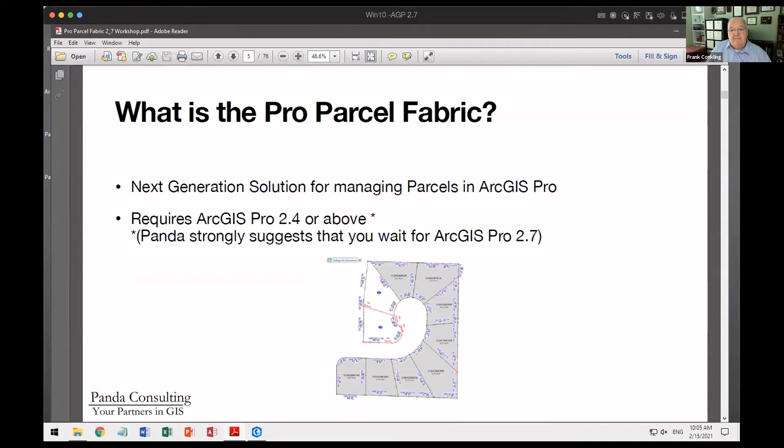So the parcel fabric, what is it? What does it do? Obviously, it uses ArcGIS Pro. You need ArcGIS Pro to work with the ArcGIS Pro parcel fabric. And it differs from previous attempts to build some sort of parcel editing solution, in that rather than being a complete configuration, the parcel fabric is something different, and the way you deploy it is different.

The first thing I'm going to do is look at a geodatabase here, the WLIA geodatabase. It's got some standard feature classes in there: a parcel feature class, a road feature class, a subdivision feature class, and a municipalities feature class. These are just standard feature classes, nothing strange about them at all. If I open and look at them in the design component, I can see the standard types of fields that are in here, nothing strange or unique about it.

So I just want to pick up and start with this. Let's build our parcel fabric. Let's look at the parcel fabric and see how it's actually constructed.

The first thing we want to do with the parcel fabric is create a feature dataset. Now, why a feature dataset? What does a feature dataset need? A feature dataset is required primarily because all of the feature classes inside of the parcel fabric share topology. And in order to have topology, you need a feature dataset, which defines the spatial reference for all layers grouped underneath it.

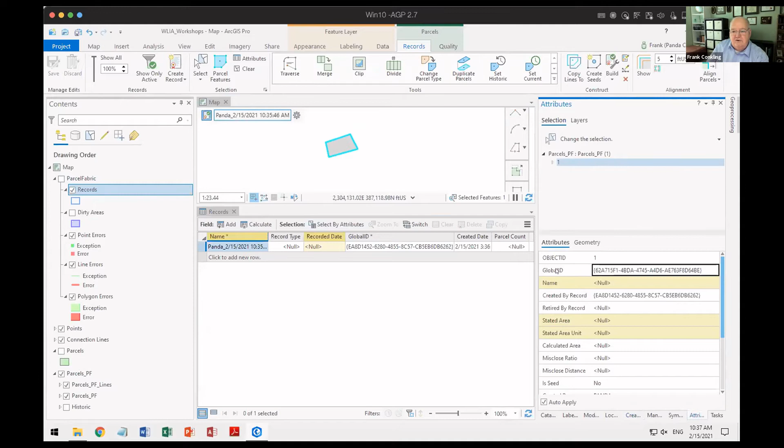So now this polygon that I just created has its own global ID, but it also contains the global ID from the record that was used to go and build it. So it's tracking the global ID of the record that was active when I built this. That's the key, that's the Rosetta Stone to the parcel fabric. It's the global ID of the record, and it's going to use that over and over and over again.

So if I go in here and say okay, well let's go and create some lines, and I create these lines and I select them, those lines, when I look at what is common through all of these records, it's that created by global ID. It goes and marks everything that's created at this time while this record is active, marks everything with that global ID of the active record.

I'll go a little bit further. Let's select that and delete it. Now, it really didn't delete it. Actually, it did delete it because I didn't mark it historic. Sorry, live demo.

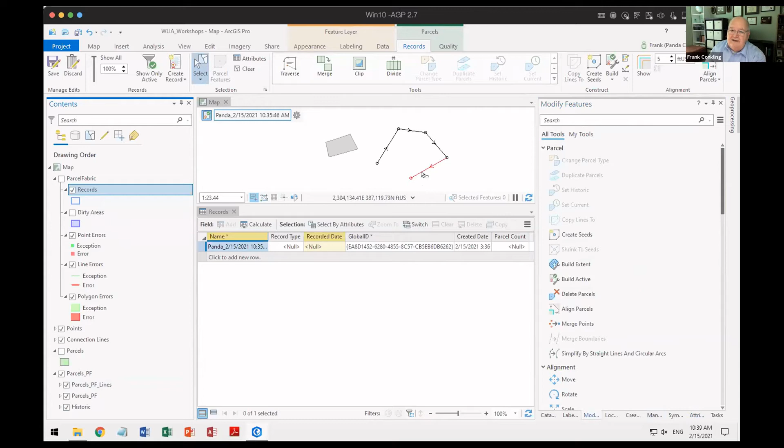Let's take this and go back to my modify and set that as historic. It didn't delete it, it actually just set it as historic. And if I go and select this now, I will see that not only does it say that it created it, but it also retired it, it marked it as historic.

Again, this is the Rosetta Stone for how everything works inside of here. Let me go and delete all of these out of here. Okay, let me take this one again.

Let's demonstrate really what the parcel fabric is doing. It's not just organizing it, but it's actually applying and making sure that the rules are complied with, that it goes and complies with every rule that's defined as part of this parcel. And remember, we said that a parcel has, let's go in here and look at the properties, and it has inside of here, the rules are that it has to have a record associated with it.

It has to have lines on top of it, and the lines have to have points on the end of them. Well, right now I have a polygon that's not in compliance with any of those rules. It has a polygon, but it has no lines, no points or anything on it. So when I tell it to go and build my active record, it will go and automatically create the lines and create the points for that polygon that I created.

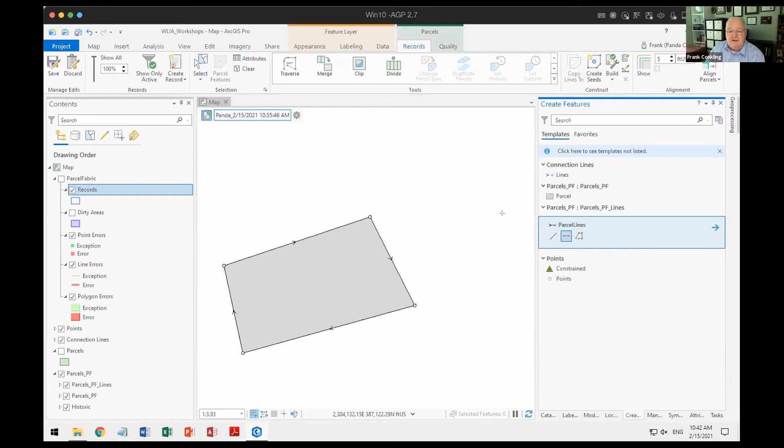Same way, if we were to go in here and say, well, let's just build some lines again. We can build these lines in here. And I can say, well, let's go ahead and build this. It's not going to build anything else because it's not sure that I want to create a polygon out of this. In order to create a polygon, I create what's called a seed. And that seed, this is really big, actually tells the parcel fabric that there's supposed to be a polygon inside of there. So I can tell it to build it.

It says, you've got a record that has polygons. Make sure that polygon all has lines on it. Or you've got a record that has a seed. Make sure that that seed is built out so it goes all the way out to the lines. Any questions on this? None?

All right. I'm going to discard everything. I'll also take care of this. Delete this. Delete this. And I'm going to go to manage, and I'm going to go and delete my record. All right, I'm back to a clean parcel fabric on here. And I have here my parcel types. Disregard this. Let's rename this original parcels to be migrated.

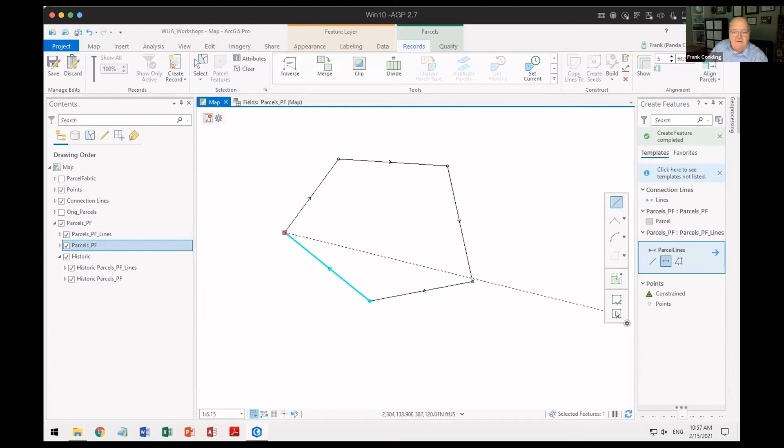So the next attribute field that we're looking at inside the polygon is seed. This tells the software whether or not this polygon, this seed, should be expanded out, whether or not the group of lines is intending to be a polygon or not. Let's go back here again and examine this a little bit more. So I can go in here and I can draw a series of lines, and just sort of graphically do that.

And then I could go in there and I could say, oh, I forgot to create a record, didn't I? Oh my gosh. By the way, most of the times I do this, I do it on purpose. Sometimes I do it by mistake. But I'll use this to illustrate.

The record is the organizing element. If you don't have a record, you can't use any of the parcel fabric elements. You must have a record active that it's going to use to track this. I created a bunch of lines. Do I have to go back and recreate them now? No. I can create a record here, select these lines, and pull down this and say, assign those lines to my record. It went and calculated the global ID of that record and put it on every one of those features that I had selected. So again, I retrofitted a series of lines to a record.

Now I can go in here and say, create some seeds in here. It creates 3 seeds. I can go in here and select this seed. And by the way, this is a polygon. It just has really weird geometry on it. It basically is just a circle. It's the beginning of a polygon. It is a polygon. The only difference is that this attribute here says this is a seed. This is the beginning of a polygon, not a full-blown polygon. I'm going to delete that seed.

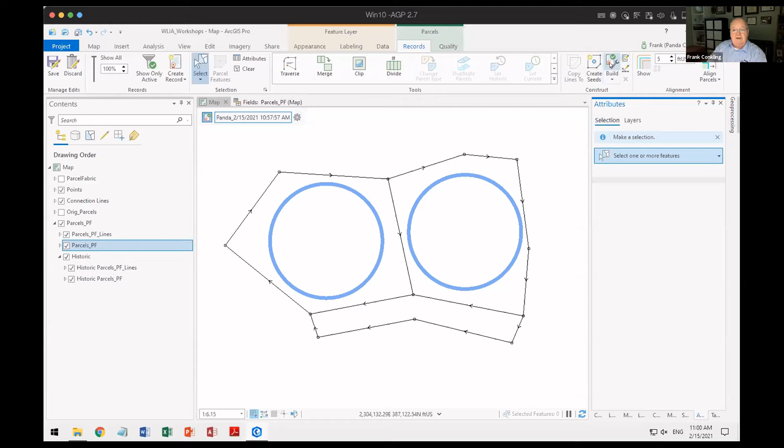So I'm going to say build. It will build these 2 polygons, but because we did not have a seed here, it did not build this polygon, which can exist as just lines inside this record. The rule is that the features have to have a record. It doesn't say that all closed lines have to have a polygon associated with them. All right.

So let me go and discard that. Let me save all this here. Let me go back to here. So on the parcels polygon feature class, I have an isSeed attribute. And again, it's either yes or no. By default, it's set to no.

All right, the next 4 attributes are editor tracking. By default, your parcel fabric must have editor tracking turned on. Okay, must have editor tracking turned on. However, I'm not going to tell that joke. These are not the same editor tracking fields as were in the ArcMap parcel fabric. These are the new editor tracking fields.

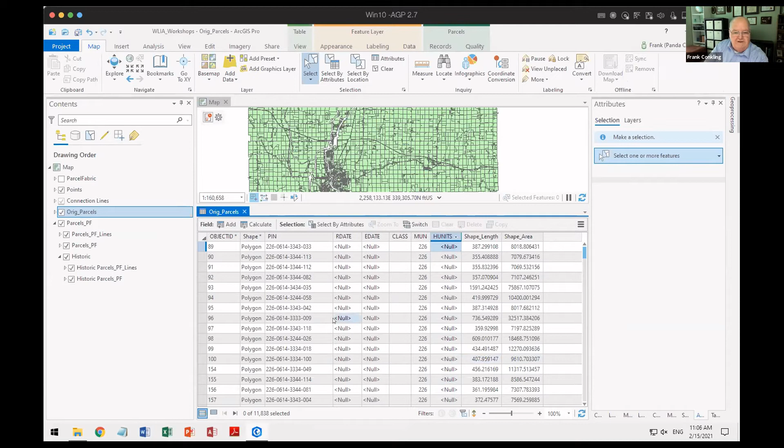All right, it looks like they're almost all populated. They may not be consistent. This one here, this H units, doesn't look like it has anything in it. Probably is intending to be housing units, but we're going to keep it in there anyway. So what we're going to do is take these parcels, these polygons, and load them into our parcel fabric.

There's a geoprocessing tool called Append that we're going to use. And this is going to tell us what we want to append. In this case, we're going to append our original parcels into our parcels PF. Really important is this next step, the field matching type. If I keep it where the input fields must match the target fields, it's going to fail because the fields don't match. They are different schemas.

Instead, what I want to do is create a field map and say, if I don't have an attribute that goes into a new field, give me the option to figure out what to do with it. So I'll click on that, and it will tell me what fields it does have, marked in black, and what fields I don't have. This is very important. You must do this.

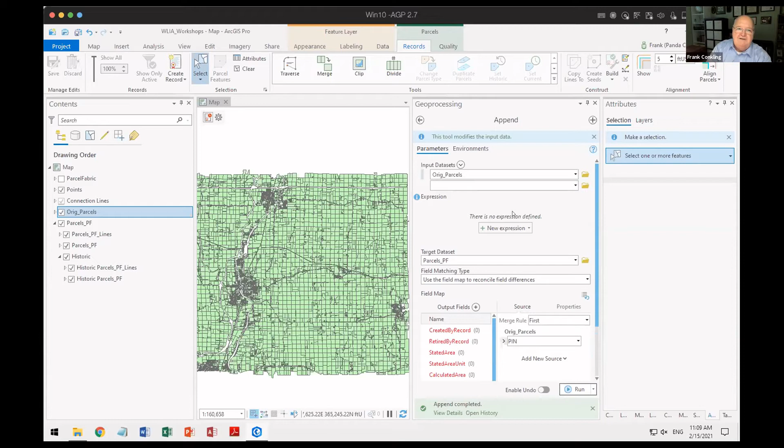What I have found consistently is the best way to do this is have both of these feature classes in a map document and do it from there. And that seems to be the most consistent way. Now that I've said that, let me open this thing up. Well, it is there. Let me open up the attributes and make sure that everything came in. And in fact, the name field came in, which is good.

Note state, created by records, not built yet. Retired by records, not there. Because I haven't really built any of this stuff yet. I've just sort of loaded those polygons in. Stated area is not calculated. Stated area unit's not calculated. Calculated area is not. Nothing is calculated yet. Misclosure distances, nothing. The seeds are made by default.

It is tracking me and tracking everything I'm doing here. And validation status is set up because there's nothing there. Here's these original attributes that are in here. So it looks like it came in correctly. Everything came in correctly. You want to make sure that that happens. There's no lines. There's no points.

There's no records. The next thing I have to do is go through here and prepare it for the parcel fabric. I have to say, okay, well, what's the first thing I need? I need a record with everything. So I'm going to go and run a geoprocessing tool called Create Parcel Records on here.

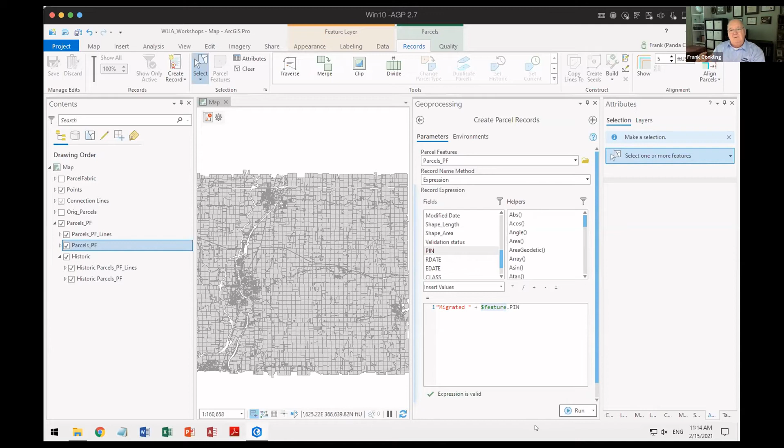I can go ahead and validate that. Yes, this is good Arcade code. This will work. Now, again, I could do a whole bunch of things with this. If these were lot polygons, conveyance division polygons, using the LGIM terminology, I could tell it to go and append not just the lot number, but I could tell it using Arcade to go and intersect the subdivision, or the simultaneous conveyance, in which that's located, and take the SIMCON name and add that with a separator to the lot name.

So I could tell, as part of this calculation, tell me where this lot is located, not just what it is, but where it's located using Arcade. Arcade using an element called feature sets and using the Arcade intersect functions against those feature sets. Arcade is an absolutely amazing scripting language. Again, you're going to find that used throughout the Parcel Fabric and ArcGIS Pro. You should learn how to use it.

All right, I'll go ahead and run this. It's going to create records for me. Just to verify, I have the one record that I created initially. All right, let's go ahead and delete that record. I don't want that one anymore, but I have no records on here.

It's another thing you don't do. I almost just did it. When you're creating records, do not have your record table open. It will give you a lock error, meaning that it can't add things there because you've got it open and have locked that table. Keep the record table closed. Let's go ahead and migrate these and create records for everything.

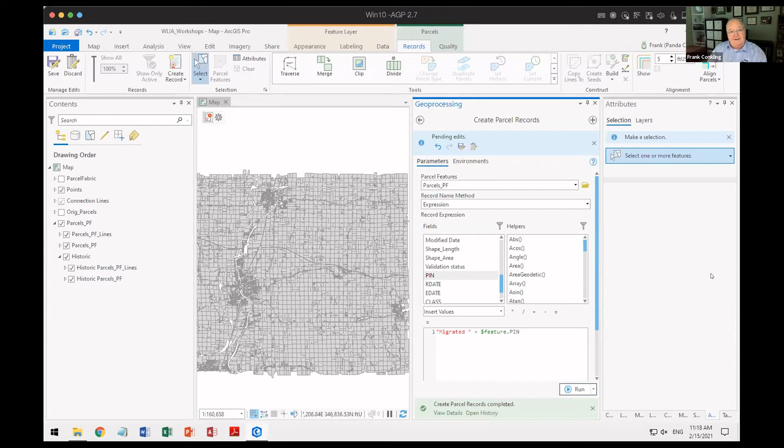Okay. Let's see what happened here. Let's go to records and open up the attribute table. And I now have a whole bunch of records, and these records all say migrated, which is the text I appended to it, and then a dash, and then the parcel number, the PIN number. It says nothing about the record type, nothing about the record date. They all have been assigned a global ID. They all have been defined as far as the date that these records were created. And finally, it tells me how many parcels are part of that record.

Now, interesting, I never checked. We actually have a couple of parcels here. We have Bark River here, which was 2 parcels. We also have another one here, which is a multi-part polygon, which has 2 parcels. So the next question is, can the ArcGIS Parcel Fabric contain multi-part polygons? Because if you recall, the ArcMap Parcel Fabric always had a problem with them. The answer is yes, you can. Still a little funky once in a while when you're doing clips, but it can do multi-part polygons.

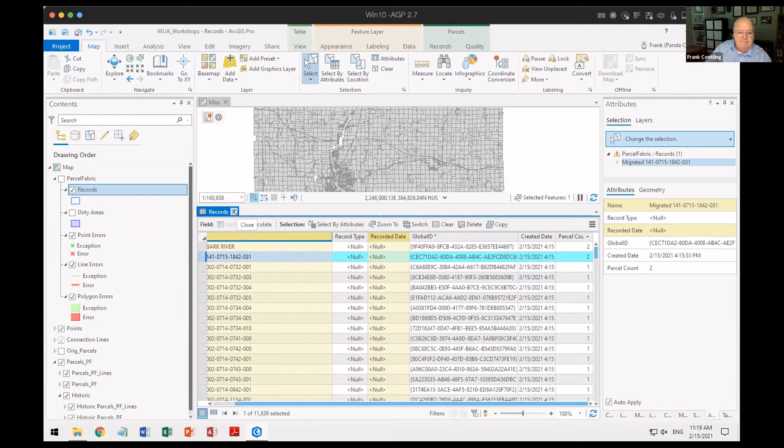So I now have records. If I go in here, I still don't see any lines. I don't see any corners in here at all either. So if I look at my parcel lines, there's no parcel lines created yet. So while I may have migrated those polygons in there and I created records for them, I still have not built this parcel fabric yet to be everything that it needs to be. It hasn't validated anything on here.

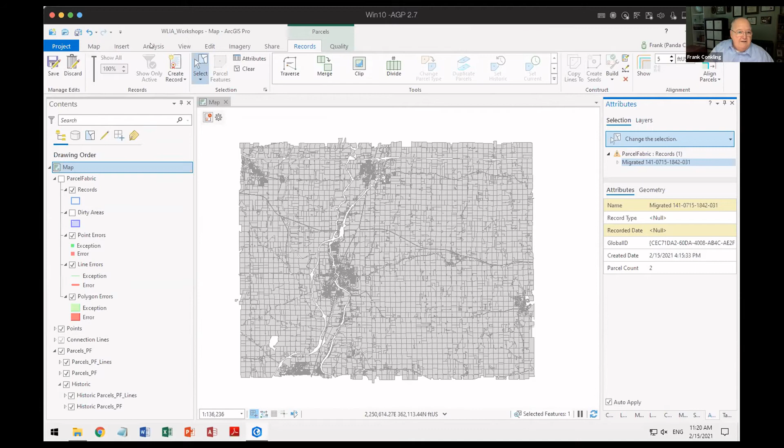So let's go out here. I guess I shut that down, didn't I? Let's go and open up our geoprocessing again. And now what I'm going to do is say build my parcel fabric.

Now remember, a build is nothing more than the controller object looking at the records table and saying, if I have a polygon here, does that polygon have lines on it? If it doesn't have lines, we'll build the lines. Does it have corners on the ends of those lines? If it doesn't have corners, it will build those corners for me automatically. That's all the parcel fabric does, it checks the rules to make sure they are complied with.

So now let's go in here and say parcel fabric, and for the extent I want to build my entire parcel fabric, build all of these out. And say run. So it will go through and build these, and it'll take a couple of minutes to do that.

Any questions? Any comments yet?

Anything in here? Now, by the way, this is usually where ESRI kind of stops. It says, okay, you have a parcel fabric now, and you can work with this. Yes, you can, but there's a whole bunch of things in here that are nowhere near being complete. It's nowhere near something you can actually work with. It's not done yet, not fully baked. It is a parcel fabric, yes, and it has records in it, yes, but it is not fully baked in here yet. And that's where you want to make sure you talk to somebody or contract with somebody who knows what they're doing to actually flesh out all of this. There's lots of little gotchas in here that you want to make sure are taken care of.

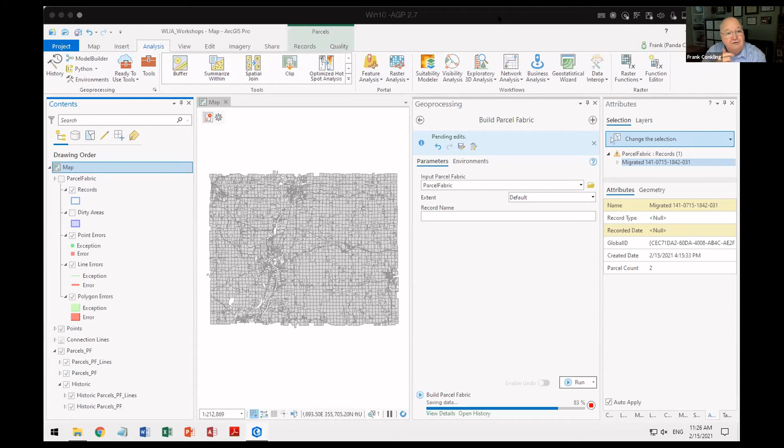So let me ask you something else. Is everybody excited about the trivia Thursday night? Definitely, yeah, yeah. Hopefully you can all participate. We're not quite sure how many teams we're going to have, but we'll see, because we don't have a sign up. You show up Thursday night, you can do that. We're going to enable teams, and we'll enable breakout rooms if you want. If people are not in the same location, you can have a breakout room and move in there to answer questions. It usually takes about, because we have 7 different categories of questions, and each category has 10 questions associated with it. We have everything from general knowledge, Green Bay Packers, WLIA trivia, beers - who can identify the beers that are in here - an audio round which asks you to listen and see if you can identify some songs that have a word in them, then GIS trivia, and Wisconsin cheese trivia. So we've got enough of those. And there are prizes. Right now the prize is set at 75 for first place team, 50 for second, and 25 for third place. We're thinking we may up that a little bit, maybe going to 100, 75, and 50. We'll have to see what sort of turnout we get there. And those prizes, by the way, are going to be Amazon gift cards so we can just send them to you by email. All right, it looks like it's finished.

So how do we know it's finished? Well, we have a whole bunch of points in there, don't we? We have a lot of points in here. And I'm going to zoom in here. And now what I'll find is that...

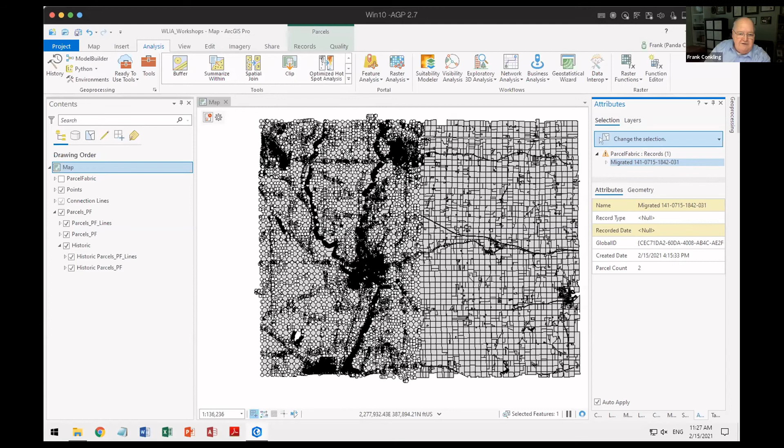We have some points in here. We have points, we have lines in here. We have some early symbology set on here. Let's talk about what's not here and some of the things we're going to find in here also.

So the first thing we find is that as we zoom in and out, right now I'm at 1571 and I zoom out to 2000, and those little tick marks on our lines, as we zoom out to 2000, they disappear. It turns out that what the Parcel fabric has implemented is scale-based symbology.

And that scale-based symbology, if we go over here and look at this at 2000 scale, it's just a straight line. But as we move in, suddenly you'll see, oh wait a minute. As we zoom in our scale a little bit, suddenly the symbology becomes, it's got endpoints on it and such.

And that's a little disconcerting when you first start using this thing because of the way it's set, where maybe you're going in and doing a big parcel and suddenly you lose all the endpoints on here. We're going to talk this afternoon about how you configure that on here, and hopefully that will help you a little bit. But scale-based symbology is set so that as we zoom out, the symbology changes on here.

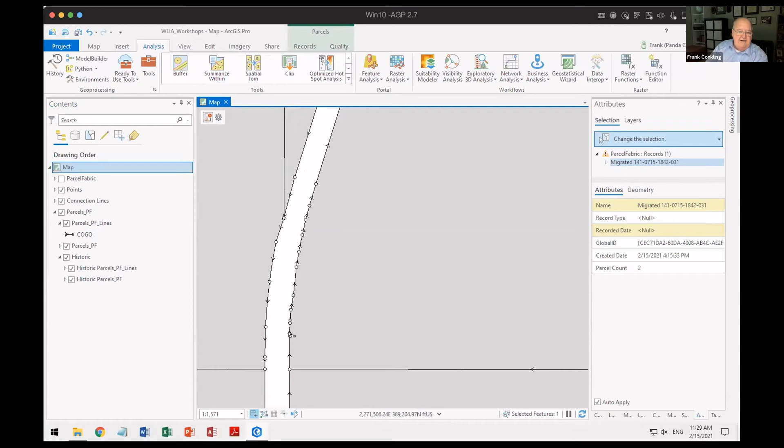What we'll also find is that, if there are densified curves inside of this data set, it does not resolve any densified curves. Things like this here. This is all a series of small lines and such that are on here.

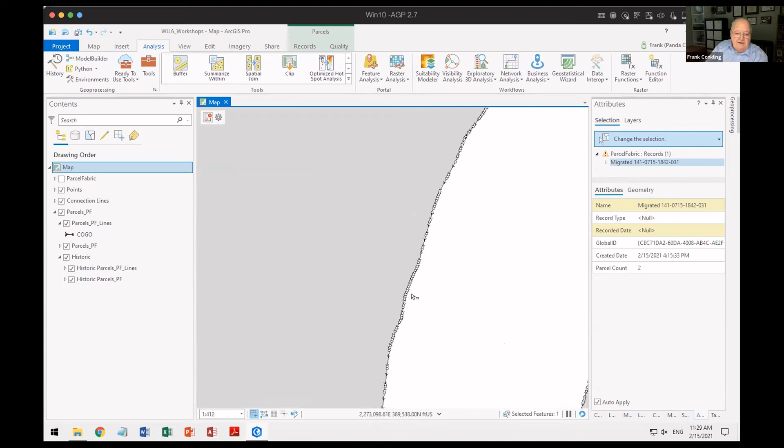By the way, we could have, if we wanted to, in order to work with that, merged points on here or merged the lines on here if we had a line feature class for that, so that it doesn't have those elements on here, all those individual small points on here.

You can have a riparian area on here, but again, these are more densified curves in here, more densified curves in here. You can very quickly see some of the deficiencies in your data when you bring this in. And I'm not looking at this to point anybody's data out. Everybody has skeletons, so don't worry about it.

So let's go and explore that one thing I just said earlier about having areas that don't necessarily have all these small lines on them.

I'm going to go in and I'm going to remember to create a record right now. I'm going to create a record. And then what I'm going to do is start editing. I'm going to go to create. I'm going to create a series of lines.

All right, and I have two options here. I can create just sort of regular polylines, and I can also create 2-point lines.

If I create polylines in here, or I go to streaming, I can go and do streaming, and I can finish this part. I can stop streaming and go back to a regular one on here.

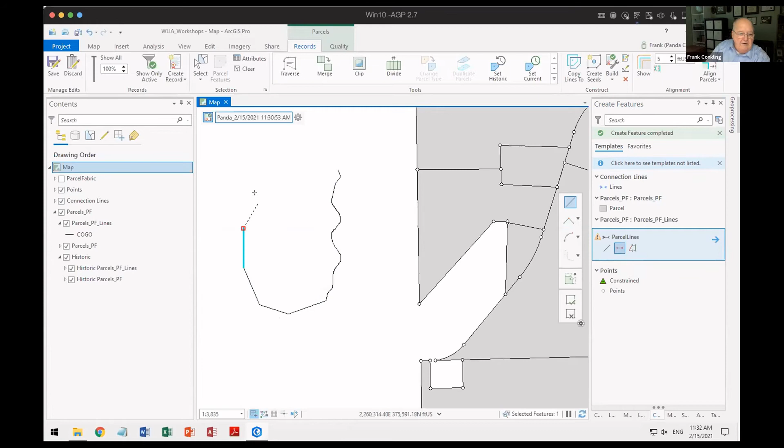I can go to 2-point lines. I can input bearing and distance. I can go in here and finish this line. It's a series of lines in here.

I can say, go ahead and build a seed. There's my seed, and say build this. And when I build it, oh, it actually did create individual ones in there.

Let's make sure. Oh, so that streaming didn't work on here. I actually went and densified those.

Ah, so let's discard that. So you can actually go and create these without...

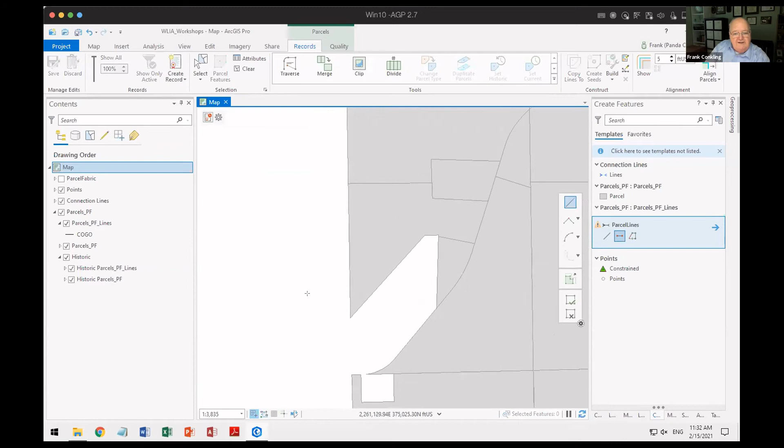I'm thinking here. I'm looking for my points and my lines. It's almost like it didn't create them anymore. Like I undid them. I discarded those without saving them. These should not have been part of my edit.

Sorry about that, live demo. I should not have done that. So what I'm going to do is go in and look at my history, and just rebuild that parcel fabric again. I did not mark enable undo, so it shouldn't have been saving it. It should have automatically been validated on here. It's okay.

Jeremiah said you're going to miss the start of trivia. It's all right. The key is just go and get yourself on a team, let them answer the early ones, and then you come back and be the white knight coming in giving them all the answers at the end, right?

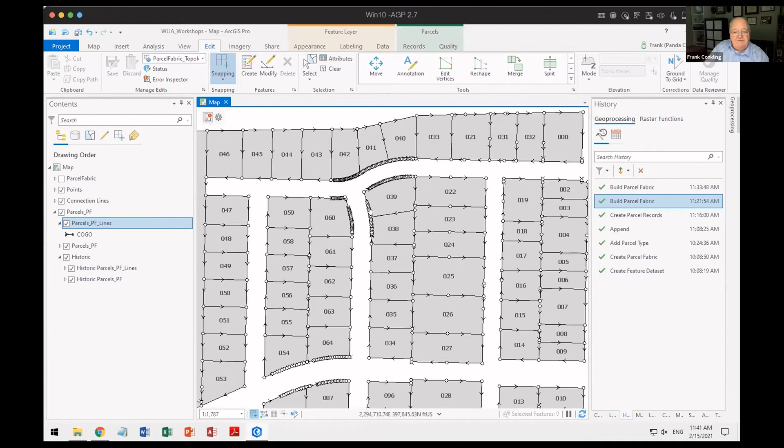So again, going through this is now built. Let's make sure that I save this project and that I save my edits and not undo them anymore. All right. And again, some of the things you want to watch out for is when this migrates over, you've got to recognize you'll have scale dependent symbology. And if you've got densified curves in there, they will not be corrected. They can be corrected inside of Pro. If I have time later this afternoon, I may show you how to do that.

The other thing is that the lines that it does bring in here do not have COGO values on them. None of them have COGO values on them at all. So if you've got COGO lines in here, and if you want to preserve them, there are certain techniques you have to do to make sure that COGO values come across.

Depending upon where you have COGO stored, if you have it in ArcMap COGO or ArcGIS Pro COGO, there are additional iterations because ArcMap COGO fields are string values. ArcGIS Pro COGO fields are actually number fields. So there's got to be a conversion for that also. All right.

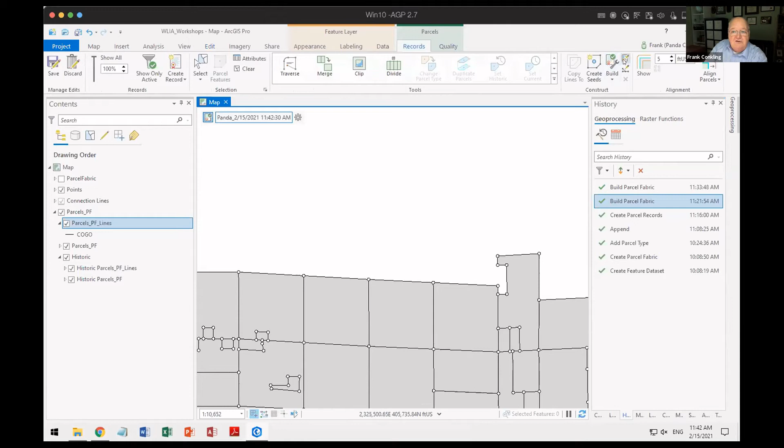So again, this is a parcel fabric. I can go in here and I can actually start creating parcels if I want. I go over here, create a record, and then I can actually start creating and inputting just a polygon, building a polygon, and then telling it to build the lines and the corners for me. All right, come on. There we go. And you can see we've got lines and corners on here now.

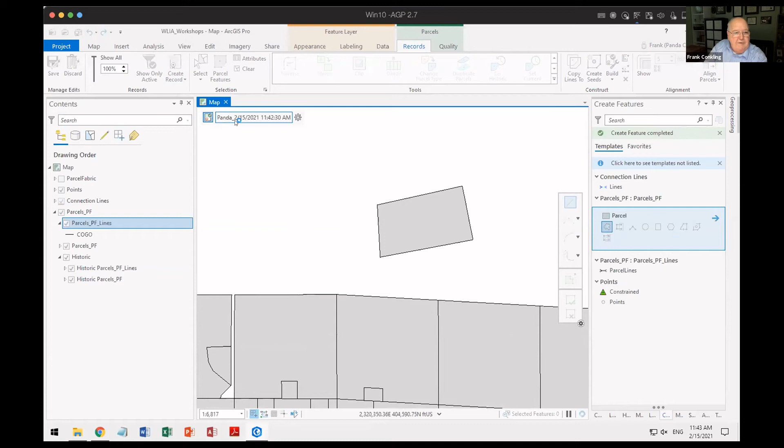All right, so let's talk a little bit more about the way this brings in all of this information. So let's turn off this and let's select lines and see.

I am seeing a slight slowdown in my computer right now, and I suspect it might be doing an interim backup for the day. Yeah, be careful with that.

So on here, when I imported it by taking the lines and told it to build these for each of these, one of the differences between the ArcMap parcel fabric and the ArcGIS Pro parcel fabric is that each parcel, each record does not have its own set of lines. It can share lines between records.

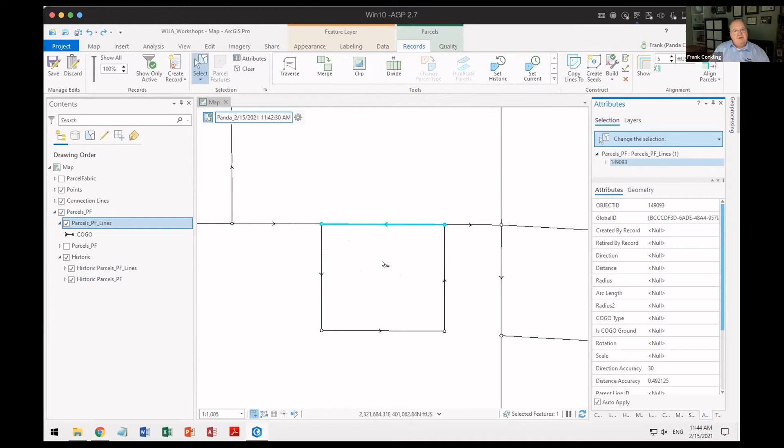All right, so it depends upon how it's built as far as whether you wind up with one line that's associated with one record, or a line that's used by this record and this record, what they call shared lines. Whether you have overlapping lines or shared lines depends upon how it's built. If I build this, let's go back here to where I was before.

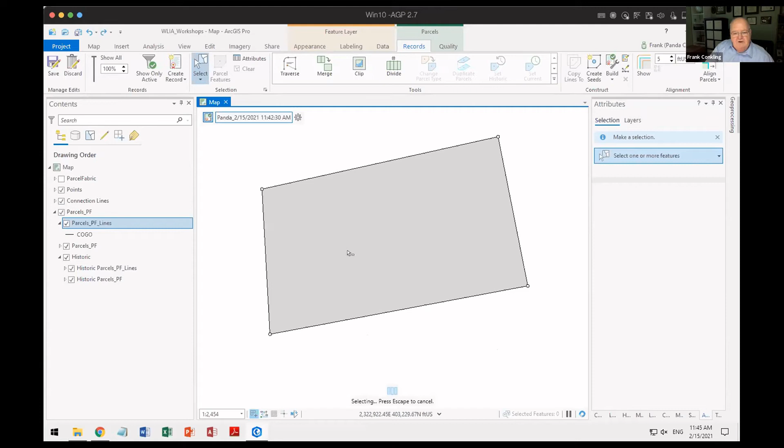All right. Put this on. So I am waiting for this. Again, I'm going to reboot my computer during lunchtime.

So on here, I have my parcel fabric. I have one line. Let's go ahead and unselect this. Sorry about this. So I'm creating just one line in here. I just want to make sure it's one line. When I created a polygon and told it to create my lines by doing the build on it, it created one line on top of each.

So traditionally, again, I'm going to use the same record here. I would create one record. I would go and build lines for that record. Yep. Sorry for this delay. I would create lines for that record.

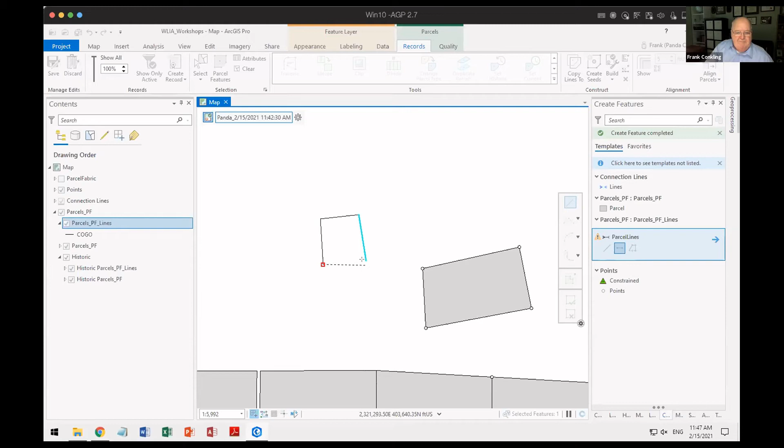Live demos. Come on. All right, let's go.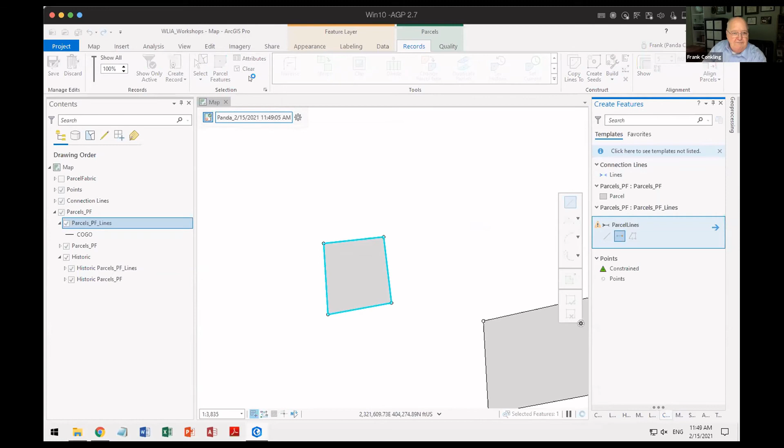And delete that out. All right, so I have one parcel in here. If I create the seed, then tell it to go ahead and build this parcel. So if I create one parcel at a time, if I'm doing parcels and they're mostly metes and bounds parcels, if I go and create another parcel here, I go and create a new record. This new record will have its own set of lines. So it will have its own set of lines here.

Come on. I am so sorry. Wow. Sorry. Sorry about this.

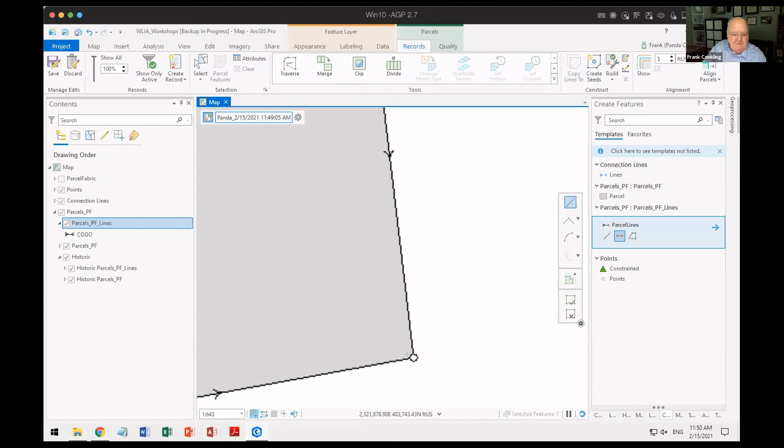So if I go in here and say, we'll go and build a parcel where you've got these additional lines on here. All right, can I build a parcel adjacent to this? And the answer is no.

When I go to create the seeds, the lines associated with this record, again, if I say select the lines associated with this record, the lines associated with this record do not build a closed polygon in here. So it will not create a seed on here. I must go and close this out.

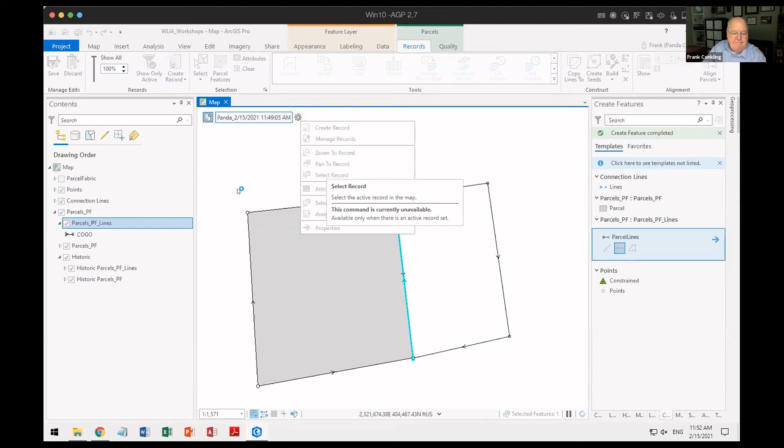I'm not even sure this is going to go and close because it's not snapping. No, it's not snapped on here. Sorry. Wow. All right, let's go and create.

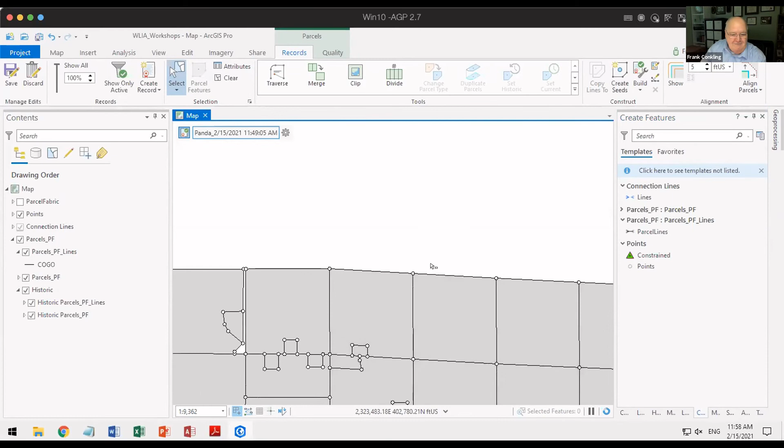All right. So as I was starting to talk about, there's two different ways in which the parcel fabric can go and manage your lines, if in fact we do one parcel at a time. So if I go to my parcel lines and I tell it I want to do 2-point lines in here, and I do a seed, and then I tell it to build this, it goes and builds it.

And then I go in and I create a new record. And then with that new record, I create another set of lines on top of here. And this is sort of replicating what you would do if each of these were a separate transaction. I have a new deed of conveyance. I create a new metes and bounds parcel, create the seeds for that, then I go and build it.

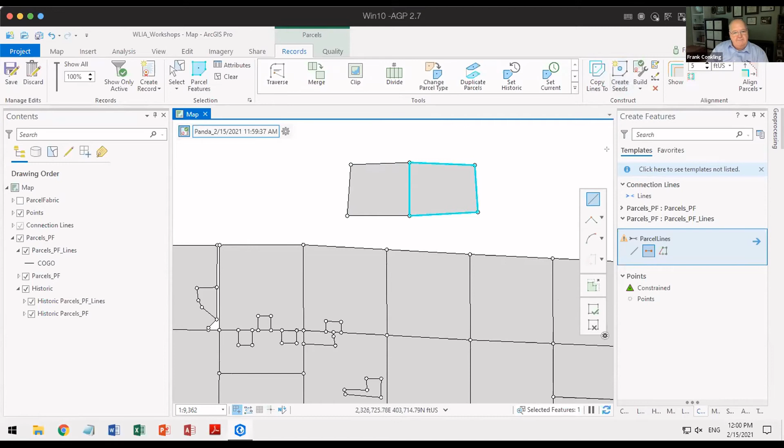When I do that, I actually wind up with two different lines on here. And if I look at my attribute table, I have two lines, one that's created with this record and one that's created with a different record. These are overlapping lines. And this is usually the way your tax parcels would be maintained, is that if there was a separate metes and bounds description, you would utilize that for building it.

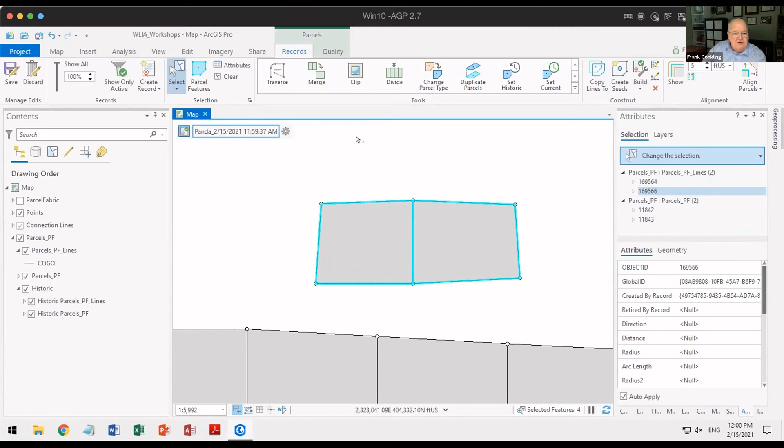And so the reason why I want to make sure that you understand this is that, for example, if I have a parcel here and I go to create lines, and I say I wish to build a parcel there, if I tell it to create the seed, again, the seed is analyzing the lines to see if these are closed lines.

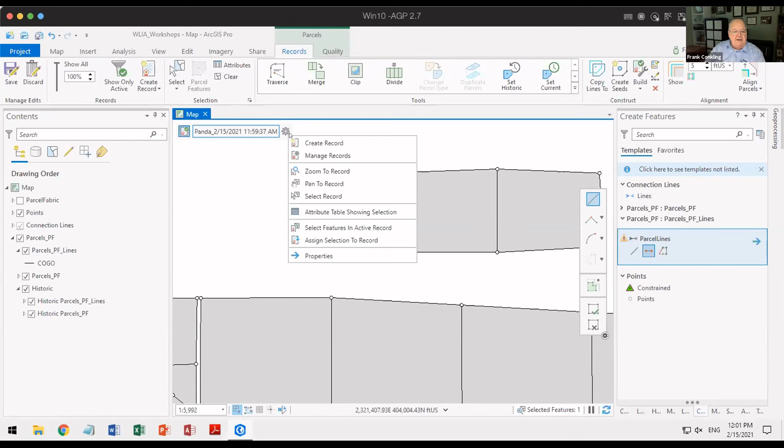It does not create a seed for me. I can click this, it doesn't create a seed. Why does it not create a seed? Because in here, if I tell it to show me everything that's associated with my record, it turns out that I don't have a line here that's associated with this record. I can put a line here, and when I put a line there and tell it to create the seeds, then it creates it and it builds it.

So for certain types of parcel types, you will have overlapping lines. Other types, you will not have overlapping lines. You'll have a shared line between them. What type of a parcel would that be? That would be, for example, a PLSS section parcel, in that they don't have really two different lines. They have one line that's shared between them. So I could create

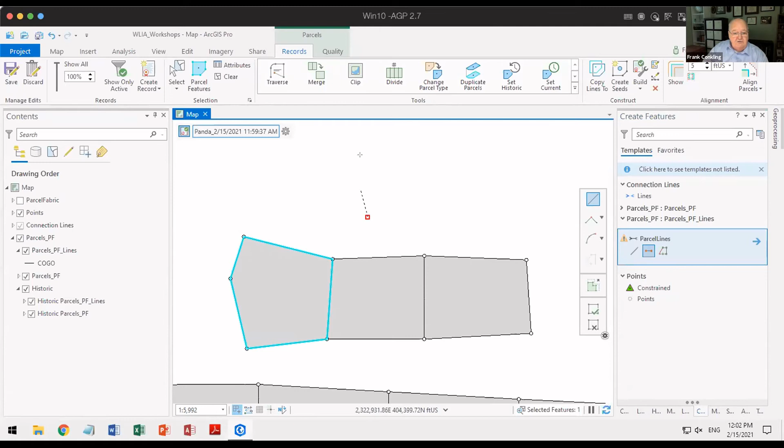two polygons in there. These could in fact be two sections of land. They could also be two conveyance division parcels in here. And when I create seeds, it will create them both. And when I build them, it will build them both. But when I go down here and look, there's only one line between the two.

So within the parcel fabric, there are two different ways in which lines are utilized and created. One is where they are separate because of the way these parcels are created, how they came into existence. And that's probably a better way of describing it, where they came into existence. If they came into existence one and then one and then one, they will have two lines, one for each of those sort of births or each one of those records.

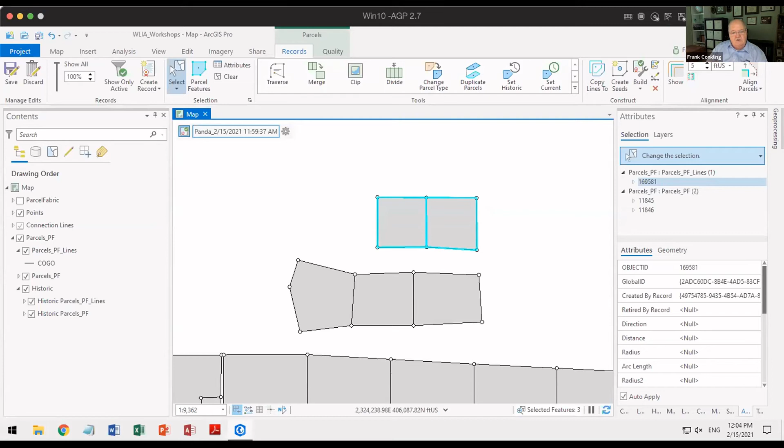If, however, they came into existence all at once, or a better way of saying it might be if they came in with a simultaneous conveyance, they were created at one time, such as conveyance divisions, such as public land survey systems, they would share lines. So inside the parcel fabric, there is this concept of two different ways in which lines are used. One is a shared line, one is an overlapping line. All right. We're done with all that.

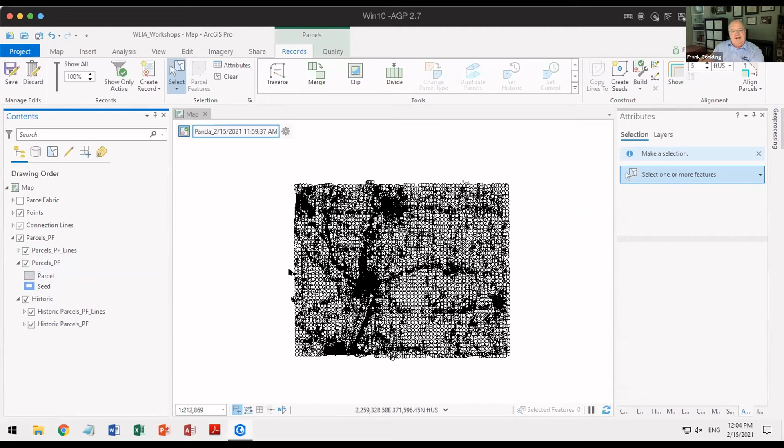So again, this is a parcel fabric data set that's for all intents and purposes ready to use. You can see things like symbology is not set very well. Things such as the point feature class is displaying so far out. There's a whole lot of things that you want to set inside of here to make it seem better. So we've built out parcels. What about building other things in here? Because remember, with this data set, we have parcels, we have roads, we have subdivisions, we have municipalities. Which of these are we going to bring in to our parcel fabric?

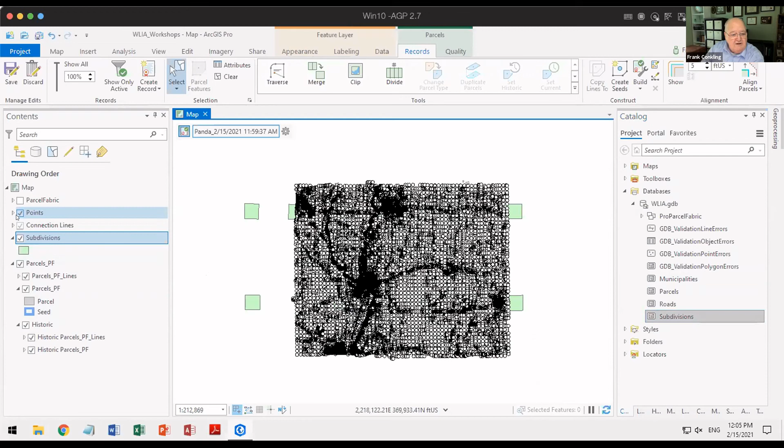Let's bring in subdivisions. All right, let's go ahead and bring these in. I put them in here only because we want to just show where these things are. If I turn off my parcel fabric here, and I turn off my points, here's this small element in here that we've got. Again, this is the parcel fabric, and here's the subdivisions inside of here.

So we go through this exact same process, but we want to put this next one in. We're going to start by creating inside the parcel fabric a new series of feature classes that are set up for the subdivisions. So we'll go to manage and we'll add a new parcel type. And again, we want to name it differently than this. We're going to call it subdivisions PF, and go ahead and tell it to create that.

Once you've been through this a couple times, you sort of get used to it, but it's still things you have to think about. Oh, it's saying it's being edited. So I can't create this while I'm editing over here. Common issue. So how do I handle this? Two things I could do. I could get out of my current project and do it while I'm in a catalog version of this, or there's a trick here.

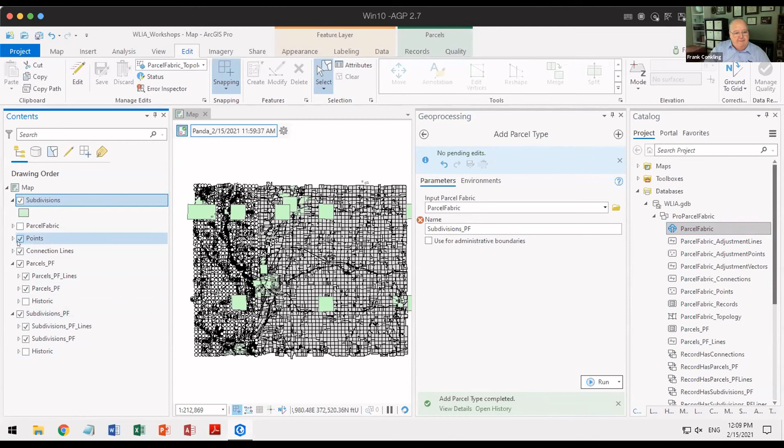Oh, interesting observation. ESRI has slightly changed the way they do this, but with 2.7, as you're building a parcel fabric, the first parcel type that you build will be on top. The next parcel type you build will be the next one down. So the first one I built was the parcels PF, and then it came to the subdivisions PF.

With earlier versions, it was inverted. The first one you built appeared on the bottom, and then it built on top of them. And they've corrected that now with this latest version. So now you build from the top down instead of from the bottom up. Observations, that's all. All right. So I've got this now.

Let's go ahead and open up the fields for my subdivision. Let's go ahead and open up the fields for my old data, put them next to one another, and here are the 3 attribute fields that I want. I can copy those, right click and paste them here. And then I can say, go ahead and add those attribute fields to my schema.

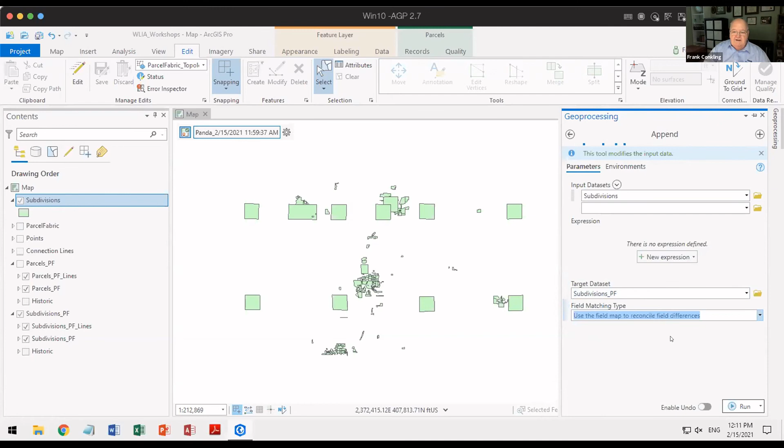I'm going to make sure that I say use field mapping, and on the name field, I want that name field to be the MUN PLAT NO, the MUN plat. Let's make that the plat name instead. All right, add that as selected and say, go ahead and run this and let it append the polygons from the old subdivision layer in, and move them in.

To verify that this worked, let's open up that attribute table. There's the name that got populated correctly. Go in here, and here's the plat number, plat name, and document number. So that did get populated correctly. We're done with that guy. So now we have the polygons in here.

We're going to use the parcel fabric and the way it works to build the lines and the points or anything else it needs. In order to do that, we need to have records on here. So we're going to create parcel records. I'm going to tell it this parcel fabric. Actually, what we're going to do is the subdivision PFs. And we're going to do an expression.

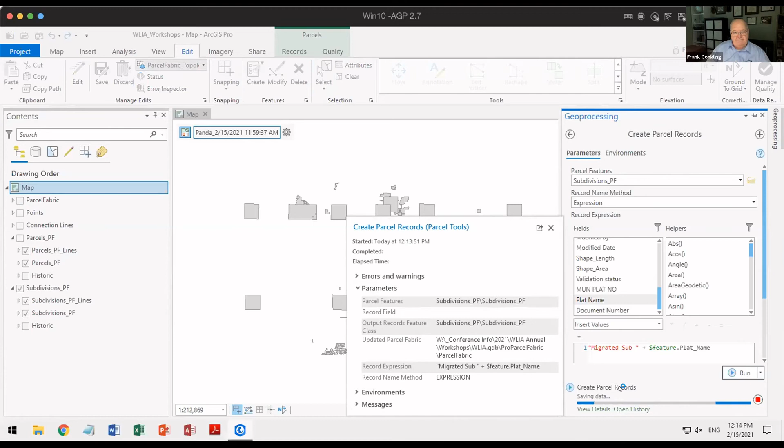So it has gone and created the records for me. Just to verify that, let's go in here, go to records, open up that attribute table, and let's go down to the bottom. Here's the subdivisions in here that I created. These are the other values that I used when I was building this stuff up. I created records and stuff like that. None of them are valid, but I've created them. All right, I've created records.

I've appended those on here. So what do I have left? I go in here and I build parcel fabric. Go ahead and take this, and since I don't have an individual name I want to go and build, I can just tell it build everything on here and it will go through and rebuild it.

But again, what this process does is it goes and looks at the record table. For every record in there, it sees whether or not there's polygons, whether or not there's lines, and whether or not there's corners. That's really all that the parcel fabric does, is it makes sure that it complies with the rules, makes sure that it has the right structure. And eventually this afternoon, we'll talk about attribute rules and other things like that, and make sure that it's in compliance with all of those.

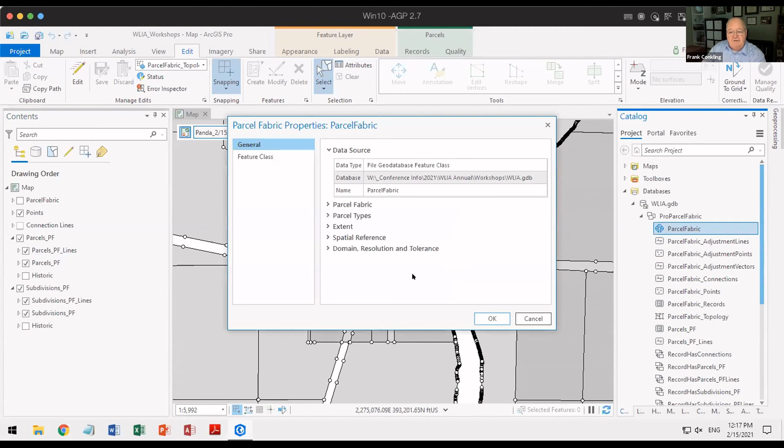So let me just give you all warning. In order to serve the parcel fabric out, the enterprise server software has to be in agreement with the desktop software, or put the other way, the desktop software has to be in agreement with the server software, as far as the release of the parcel fabric. The parcel fabric that we have built here is version number 4. If you use 2.7 to build it, it's version 4. If we use 2.6 to build it, it's version 3.

Version 3 uses ArcGIS Enterprise 10.8.1. Version 4 uses ArcGIS Enterprise 10.9. So if you're migrating this and eventually plan on having it on enterprise, you want to make sure you know that before you build the parcel fabric in the first place. If you don't have 10.9 and don't intend on going to 10.9, don't use 2.7 to build the parcel fabric. Use 2.6. Esri is aware of this, but you want to be careful with that. Just know that. All right, thank you.

Okay, so we actually have this in here. If I turn off my parcels, here is my subdivision polygons. And notice, some of the differences you'll find is that even though I've turned off my parcels, the points associated with those parcels are still displayed, and they will always be on. If you see a point, it means there is something associated with that corner. That could be a current parcel, or it could be a historic parcel. As long as it's connected to something, it will display that. All right.

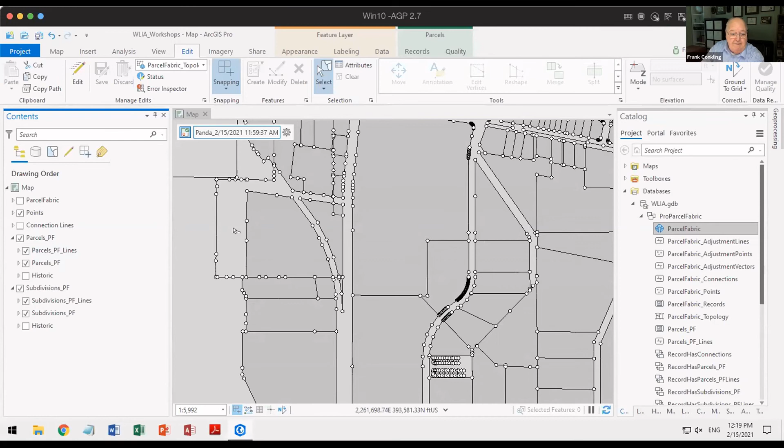So again, the subdivisions are now in here. They are built. The subdivision polygons and polylines are in here. It has lines for everything, and they all have their global IDs and created by records. No COGO values anywhere at all. So one of the questions often is, how do I get my COGO values in here? I've got my lines here for my subdivisions. I'm going to tell it to select every single subdivision line.

On my modify pane on the very bottom, I have a tool called Update COGO. And my Update COGO tool is not enabled. Why is that? Because of this edit button here. I have to click that button before this is enabled. Now that it's enabled, I can tell it to update all of the subdivision lines, and it will calculate the COGO values for every one of those subdivision lines.

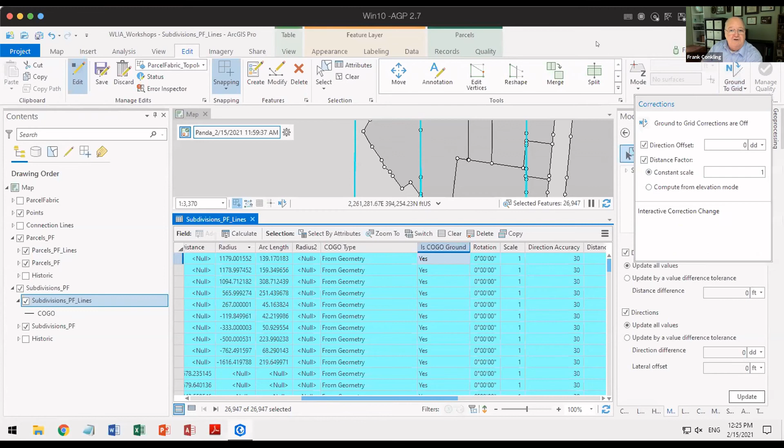All right, and then if you do have a rotation in here, you can tell it what the rotation is, and it will calculate the scale on there also. So they actually will go and add that in there.

All right, so I've taken the subdivision fields and I've calculated those so that it now has the values on here. And when I go in, you can actually see that it's inputting labels for all of these values for the subdivision lines on here.

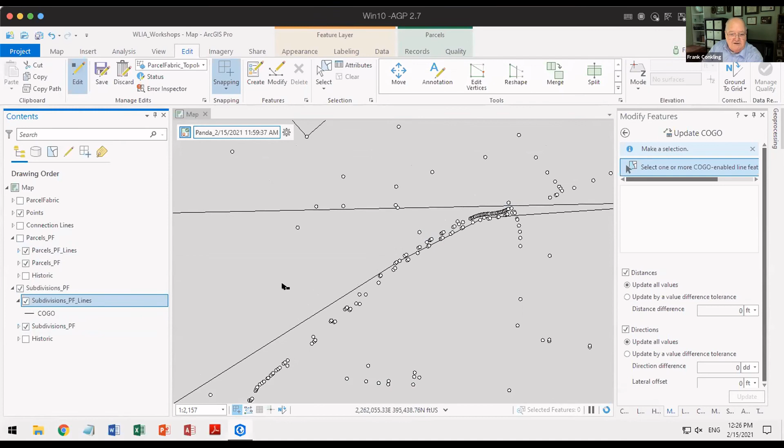It will probably help if I turn off this so you can see these lines in here. Again, these labels have scale dependency on them, so that as I go in here.

So let's look at this. How does it handle the labels? Because these are labels, these are not annotation.

These are labels. So if I go to my table of contents, all the way over on the right-hand side is the list by labeling. And it turns out that I can either tell it to label the direction and distance, which is what it's doing now, or I could tell it to turn off and only do the distance for me.

All right, so if I go in here, let's look at the labeling properties. Come on, here we go. So I'm looking at the direction and distance field right now, and this is the arcade label expression for this. All right.

All right, and this is a fairly intense label expression. It's got a lot of variables that are set up front, whether or not it uses quadrant bearings, whether or not you want to show the distance, direction, the radius, what curve parameters to go and show what you put in there.

So they've got that written all into it. In addition, they've also gone and put in here whether you got full COGO in here, partial COGO in here, whether it's valid or invalid COGO, the font size. So this is, again, a very, very intense label expression that's in here.

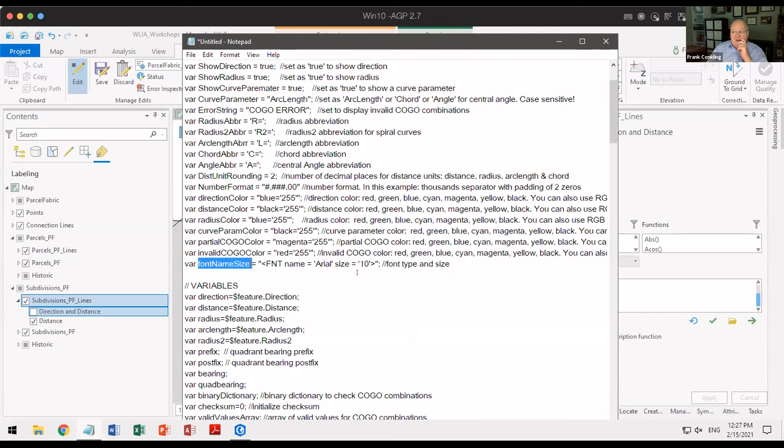But if you want to go and learn about Arcade and using it for label expression, this is actually a pretty good one. Interestingly, in here, they also go and calculate the quadrant bearing, including degrees, minutes, and seconds for the individual angle, because it turns out that inside of here, the line field, the direction field is actually a number. So it's being stored as a number. So in order to go and label this, they have to calculate what that number is in here, what that actual number is that's being shown back to you.

And that's what that portion of that expression did. And then it goes through and figures out whether or not you've got true values in here for your COGO, whether it's valid or not valid, and it puts different colors on here, shows you how to go and display the directions and the distance and any curve parameters in here that it's going to show. Then it goes and assembles the string on here.

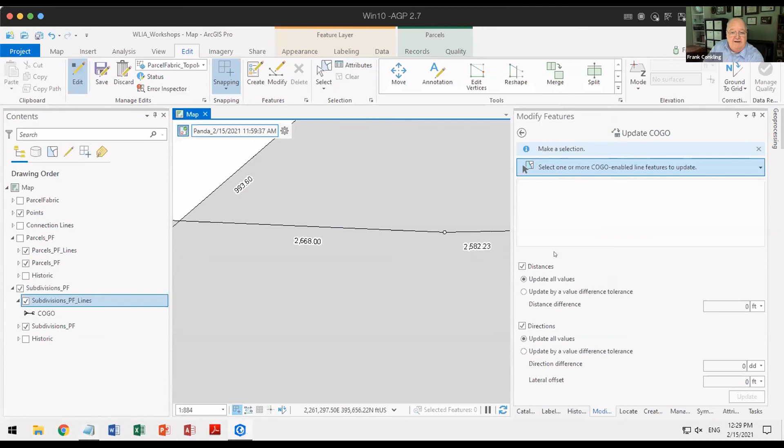So interestingly, there's a problem with this in here, and basically ESRI went and copied this same attribute, copied the same label expression, whether or not you have bearings shown or not. If I go in here and I have bearings shown, you can see that it has an extra line here that it uses for the bearing. But if I switch that over and just put distance field in it, it actually spaces that off an extra space on here.

So if it's above it, it works fine. But if it's below it, it actually puts an extra space and puts sort of some obscure spacing in here. So what we're going to do is we're going to go into the just distance one.

And it turns out that right here, if it's not a curve, I'm going to take the string and the command to go and tell it, put it on the next line. I'm going to take that out and tell it to go and apply that. And then suddenly my labels are going to show up correctly on here.

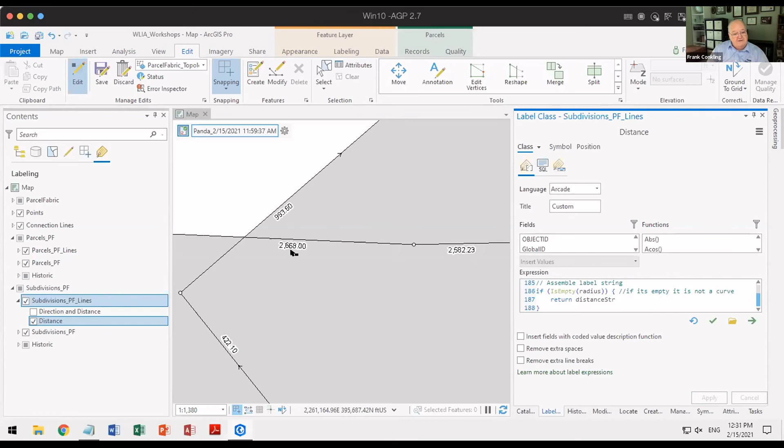So this is one of those little things that we found when ESRI put this together. They didn't quite set it up so it works for both distance and direction and just distance. Again, here it works fine. Here, now that it's been corrected, it works well. So you just want to be careful about that. As it comes out of the box, there's all sorts of tweaks that you should be doing on this.

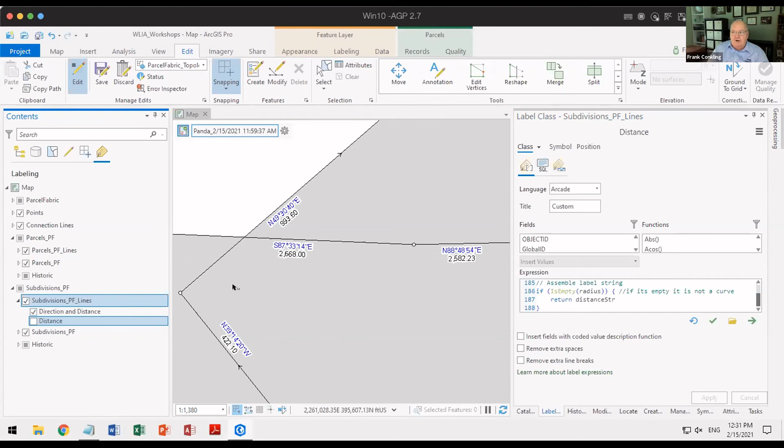All right. So let's look at a couple things in here. Let's go back here to table of contents. And let's look at densified curves. Let's figure out if I have a parcel fabric and I go in here and I go and import this in.

And my original feature classes have densified curves on them, I wind up with this. And if I zoom in here, I can see that this is actually nothing more than a series of straight lines between here. They don't have COGO on them.

If I wanted to put COGO on here, I could go in here and select these lines. And these are just the parcel lines in here. And I can tell it to go and, history here, go here and say, just go ahead and update these. I just want to know what the COGO values are in here.

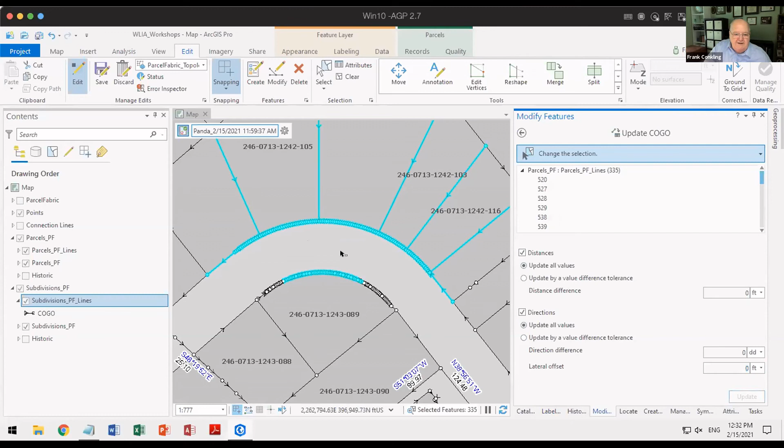And you can see these are tiny, tiny 2.5 foot lines in here, 3 foot lines, completely inconsistent with what is in here. So how do you fix that? Because if you want to use this for labeling, how do you go in here and fix something like this on here?

There's actually a workflow for doing this. What I'm going to do is go in here and work through this process to clean up densified curves inside of the parcel fabric. It's so much easier than it used to be in ArcMap, but in many ways it follows that same process. We're going to click on the parcels quality-driven workflows.

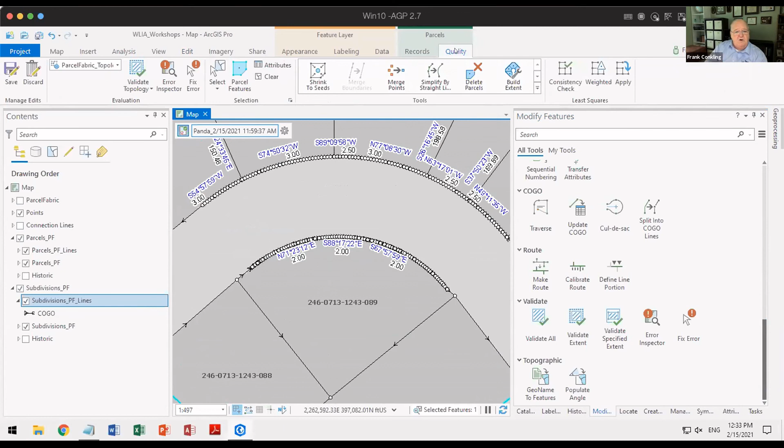The first thing we're going to do is turn off the topology. Why would we turn off the topology? We're going to use a tool that's going to rebuild the parcel polygons. If we had topology on here, when it went to rebuild it, it would attempt to delete all those individual lines, those small 2 and 3 foot lines. It would delete them, and the topology would give an error saying you can't delete this if topology is turned on. So I'm going to turn off topology here.

The next thing I'm going to do is use a tool called Align Features. This tool, I'm going to draw a path, draw a line, and it's going to evaluate all vertices within a tolerance of that line. And it's going to correct everything that is turned on.

So I'm going to tell it I want to draw an endpoint curve, and I want it to go from here to here. Now I have to tell it what the tolerance is. Let's just use a 5-foot tolerance. It's going to look at every single vertex inside that 5-foot tolerance and try to correct it so they all fit against this true curve that's going on.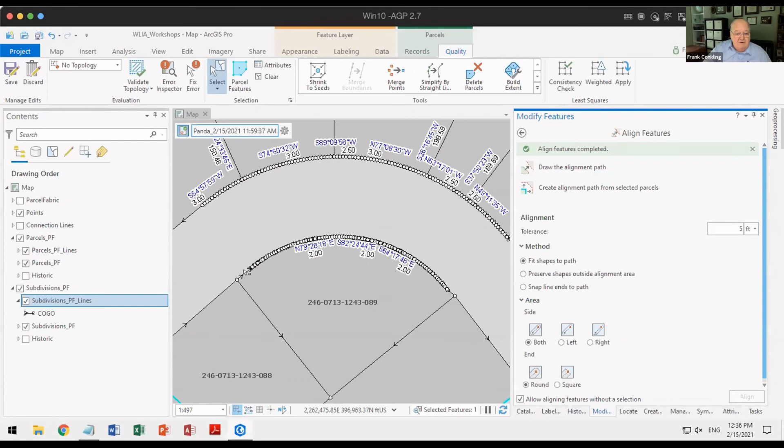I'm now going to go in here and select. I'm going to hold down my shift key and make sure I select all of those points in here. Then I'm going to hold down my control key and unselect the polygon, unselect this line here. That line's good, and that line there, that's good. I'm going to verify by going over to my attributes and saying, what have I got selected? I've got points. Good. I want to delete those.

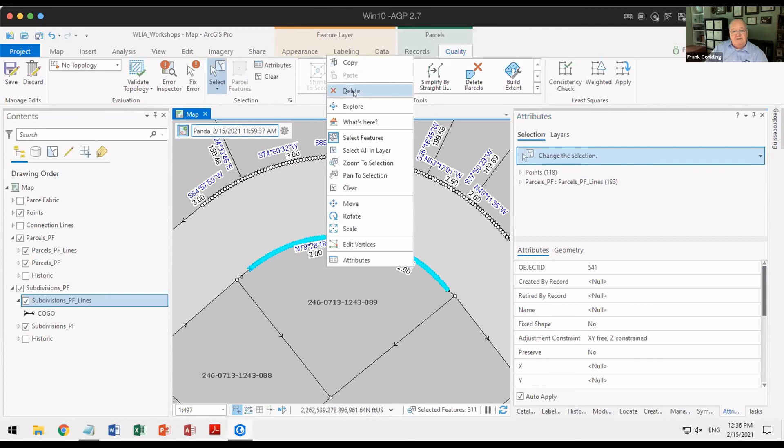I'll let the parcel fabric rebuild them. And then I've got all these little lines in here. That's good. Now I'm going to right click here and say delete every one of those things. This is the old stuff I don't want anymore. Now that I've got that deleted, I can see I've got no lines in here, so I shouldn't have any issues with that. Topology is still off.

I'm going to tell it to go ahead and build my extent. Up until this point, we've been using build active, meaning if I have an active record here - by the way, that should be inactive. But now I'm going to say just build any record that is inside my current drawing extent. So again, the build process goes to the records, looks at them, and says: do you have polygons? Yes. Do you have lines? No, let me build the lines for that polygon. So I can say go ahead and build my extent. It will look at every record inside of here and create the lines that are missing from those polygons.

So what I've done is gotten rid of densified curves inside the polygons that are represented here.

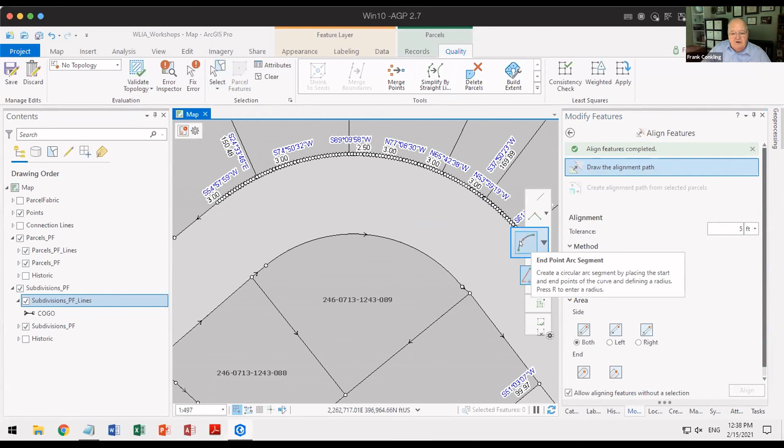So let me go and do that one more time. Turn off topology. Go to my align features, tell it I want to create a curve, an endpoint arc curve, an endpoint curve. Go to the endpoints. I'll do that. Tell it to go ahead and align to here. It will go and align them all.

I can then go and select, and then unselect everything I want to keep. Those are all - I'm holding down the control key to unselect things. I can verify and say, what have I got selected? I've got points, I've got these lines, those are good. Right click, delete that.

Now go ahead and have the parcel fabric validate the rules and check and make sure that the structure's in here for all of these so that every polygon has lines on it. So build inside my current extent. And it's gone and it's built every one of them. Each of these have its own separate line in here. And they have gotten rid of that densified curve.

Now, just to verify it, let me go and select these lines and go back to my update COGO. Say, go ahead and update the COGO on this. Now I can see here is my COGO values. These again are inverse COGO values. If I wanted to correct them, I could go and actually input those values in there. But there's my COGO values for those curves in here.

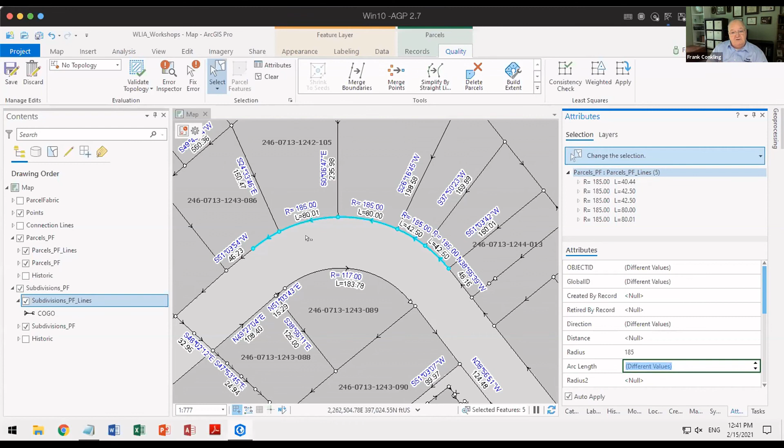Any questions on this? I went through what used to be a very complex workflow and procedure inside of ArcMap Parcel Fabric. And I did it fairly quickly. Granted, if you've got thousands of these around here, you know, might take you a while, but you can fix them. They're fairly easy to fix.

No topology. Go here, go to my align, not align parcels, sorry. Align features in here, 5 foot. Go and say start here. Go to here. This is my curve. Fix that up. Oh, what happened? As you go in here and reenact align features, be aware that internally, every single time you turn on align features, it sets that topology.

All right, so I can go in here and align features here to here. Go ahead. Do the same thing here to here. Go and select these old lines that I want to get rid of. Unselect the things I don't want to delete. Right click, delete them. Tell it to rebuild my extent.

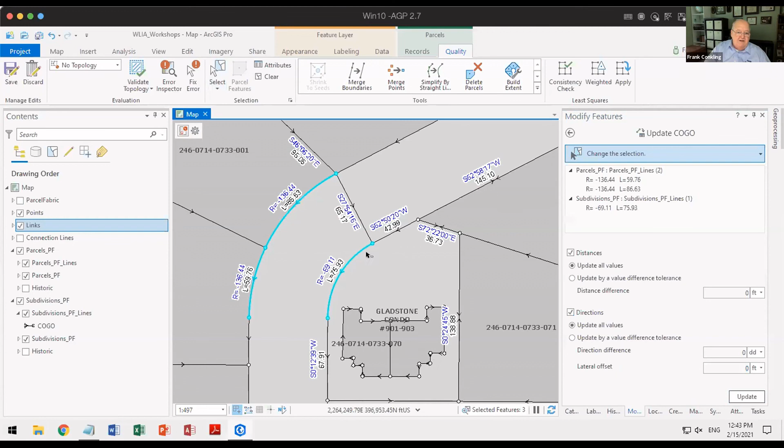If I wish to, I could tell it to go in here and re-inverse and update my COGO on here. There we go. All right, any questions on that? By the way, that's something that you give to an intern. You don't want your main mapper doing all that.

All right. We are now about quarter to noon on your time. Is there anything else specifically you want to go and find out about in here? This afternoon, what we're going to do is we're going to talk about, now that you got a parcel fabric, how do you make it easier for you to work in? For example, right now, both the parcel lines and the subdivision lines all say COGO. The subdivision polygons say parcel. How do you fix that? How do you change that?

How do you go and make sure, for example, that when you calculate a parcel, it automatically calculates all those other fields that you want it to automatically calculate? How do you put in place rules that say that when I put something in here, calculate that also? These are attribute rules. How do you put those in place? We're going to go over that this afternoon. Is there anything else specifically?

If we have time, or if you want to, we can go through the slides on deploying this inside of Enterprise. I kind of would prefer not to, only because it's just slides. There's no real demo on it. And it really comes down to individually how you've got your portal set up. There's a whole lot of things in there; it's just following a series of tasks.

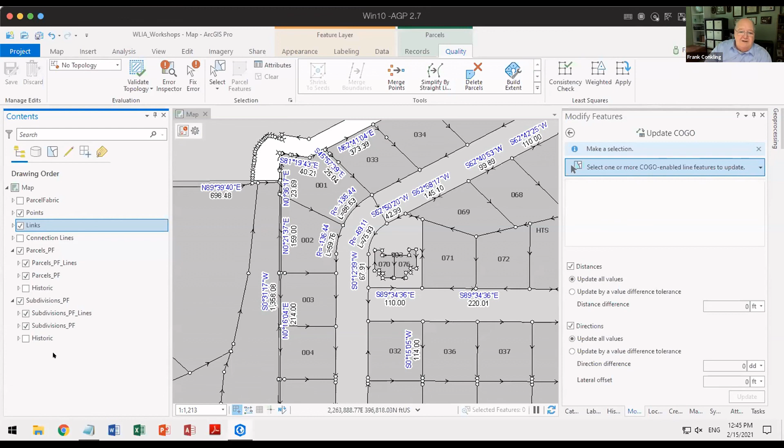15 minutes. Let's look at this. There's one more thing I can demo in 15 minutes. One of the things that comes with the parcel fabric is a set of tasks with predefined procedures for you. Now, these predefined procedures, they're a good way to start in the parcel fabric, a good way to figure out how to get working with it, but you'll quickly outgrow them. But I at least want to show you how to initially start them.

So in order to turn on the task, what I'll do is I'll go to my insert tab, and I'll go down and pull down task, and I'll say import and open tasks. And by default, there's two sets, depending upon what extensions you have. There's either the parcel fabric tasks or the network analyst. Let me pull up the parcel fabric one.

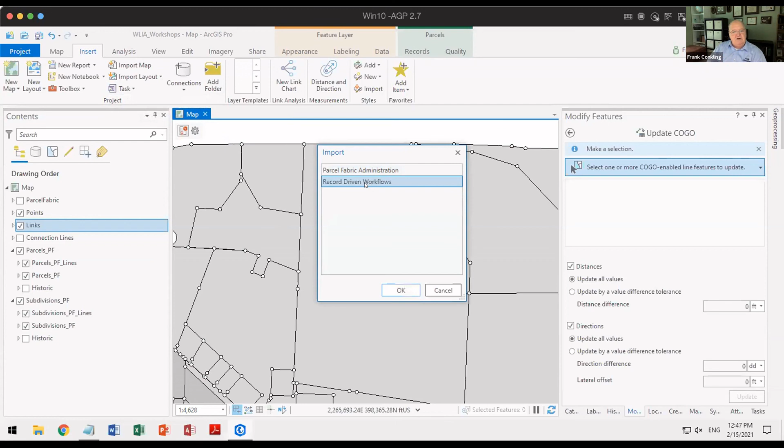So by the way, this first set of tasks, that's for publishing, and it walks you through how to publish. The second set of tasks is for record-driven workflows, sort of the everyday thing that you might do. I'm going to load those tasks on here. And when I load them, it will show me here they are. I can merge parcels. I can split a single parcel. I can do metes and bounds. I can do area descriptions, and I can do from CAD.

Careful. This is one of the things that people often stumble with. These are set up for ESRI's naming conventions. And if you brought your names in, or if you added them different, these things won't work. So the first thing you have to do is test to see, is this thing set up for my type of naming convention? And you do that under messages. And when I click on messages, it says, oh, you got problems here. It doesn't find these things. So if I double click on one of these, it will bring up the designer.

And when I click on this, it will tell me what it's looking for is the map that contains my parcel fabric. It used to be called parcel editing map. What is it called now? In this case, it's just called map. I just cleared out that problem. Now there's also one here. Let me click on this. It says it's looking, under the parcel editing map, for a layer called parcels. That's the parcel polygon. So I could pull that down and say, well, that's actually called parcels_PF. Cleared that error out.

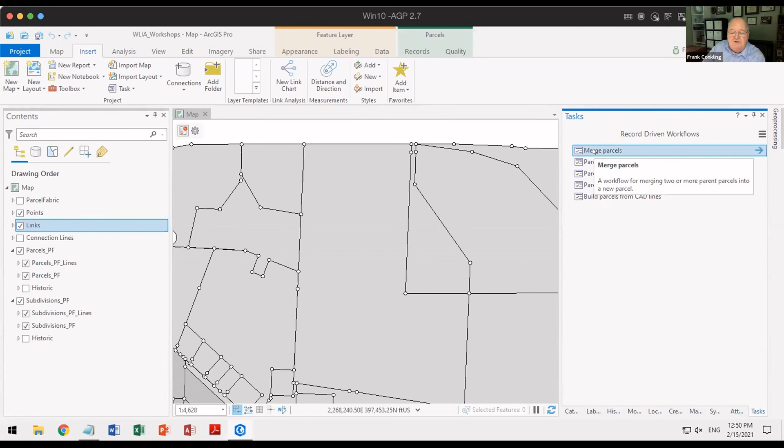So let's do a merge parcel. So I'll double click on merge parcel. The first thing it says is create a record. So I can create a record. It will create the record for me. Now it says locate the parcels, and it brings up the locators. Well, actually, I don't care about that because I'm actually right here. I don't need to do anything with it. So I can tell it to skip this one.

Now it says select my parcels. I'm going to merge these two parcels together. I'm going to say next step. Okay, you're now on merge. What do you want to do?

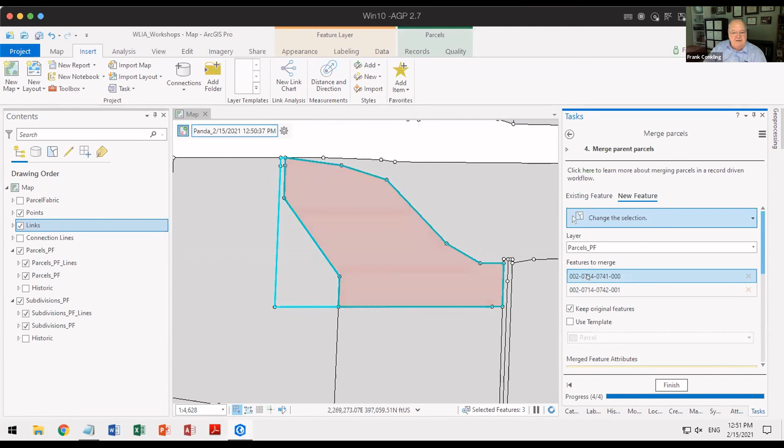Merge has a lot of options in here. I can merge it to an existing feature, sort of to clean things up. I can merge it to a new parcel or a new feature. I can merge it using a template, a different template, or if I turn this off, I can tell it merge everything into this big parcel. So merge, while it seems simple, can be very complex.

In this case, I'm going to take these two parcels and merge this one into here. I'm going to combine it, or consolidation, or whatever you call it. And I'm going to tell it to keep my original features, mark them historic. So as I do that now, I can say, go ahead and finish. It went and took my two parcels, merged them together, got rid of the line between them.

And if I turn on my historic, I can now see here's my historic parcel. If I do this here, my attributes, my current parcel is the combined one. My historic parcel is this one. If I look at the historic parcel, the created by record, because of the way it was created, and the retired by record is now marked on here. And it's gone and calculated some of the attributes.

It has not calculated stated area unit, calculated areas. None of this is calculated on here. None of this. This was brought over, but it did not take any of these other attributes over. Merge.

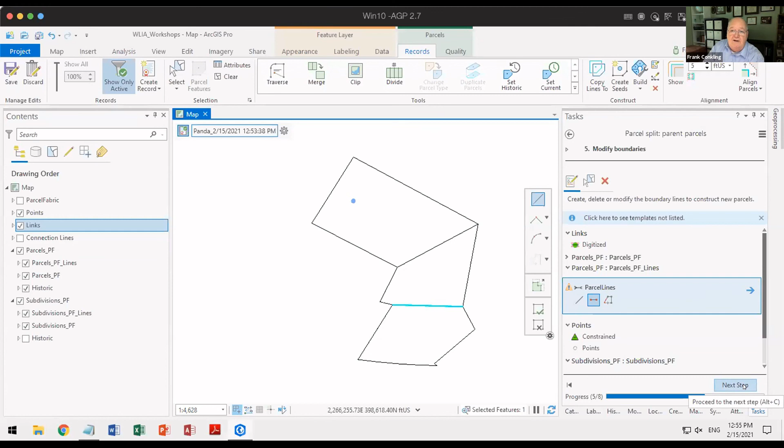Now what's left for me to do is to actually draw the line on here. And this could be as simple as, hey, it's got to go from here to here. That's where the split is. So I put the lines in here that I want. Maybe it's two of these. Next step, we'll actually go through and create the seeds and then build them. Created the seeds. It's now building the parcels. It's marking the old ones historic. There's the 3 new parcels for me.

That's the power of the parcel fabric. It runs through, makes sure that structurally it contains everything it needs. There is a set of tasks, but more importantly, those tasks are just taking the normal process and modifying them for you or putting them in place so you understand what they're doing. All right. That's merge parcels, split a parcel, you just drawing lines in.

There's also, let's finish this task. There's also splitting a parcel by building a metes and bounds parcel. Again, this is only one parcel. You can't build multiple metes and bounds on here. You could also do an area division. So if it said the east half of this parcel, you could do that. Let's go ahead and do an area division here. Create a record. Always create a record. Skip this.

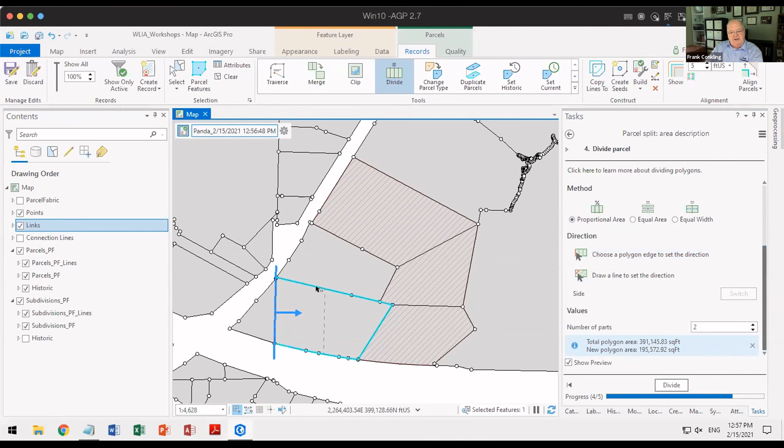Say finish. Here's one of the deficiencies with this. This does not do curves. This does not do a series of lines. So if there's a break in the line, we can't tell it to split it off of that line. It's one straight line right now, but it kind of works. There it is. And then go ahead and assign the names on them.

The tasks. The simple parcel fabric that was built, completely non-configured. Nothing's getting calculated. Nothing's working through there. All right. Any questions on this so far?

I am really shocked that nobody had a question about the tasks. Nothing. You must all be really hungry or something.

Frank, a general question is, what's your favorite thing about the Parcel Fabric and ArcGIS Pro? What's your favorite? Actually, I can tell you what my favorite part is, and then I can tell you what my favorite tool is. All right. The favorite part is this whole concept of the fact that the Parcel Fabric, if I forget to do something, all I have to do is say, build it, and it automatically goes and builds it for me. It does it for me. It serves as a second check for me.

For example, if I'm building lines in here, I have a series of lines, and I create lines, and I think that they close. When I do, it creates seeds. It tells me, you're not doing this because that thing doesn't close yet. It automatically serves as somebody sitting behind me, always checking to make sure it's in full compliance, that it's built correctly. All right, that's the favorite thing.

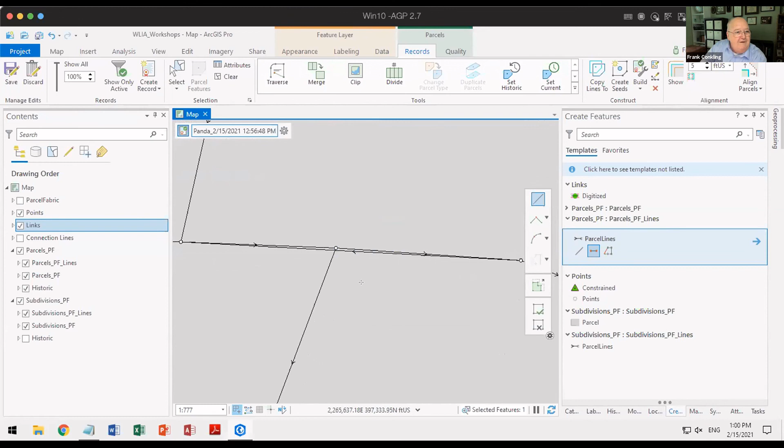My favorite tool was that one I just showed you earlier, that Align Features tool. Oh my God, I'm in love with that. That's the reason why Panda started using the Parcel Fabric. You see this right here? Turns out there's an overlap. Somebody forgot to make sure that those lines are coincident. Well, I can go into here and go to the Align Features tool. Here we are right here. Align Features tool. And I can draw, what is that line supposed to be?

And again, maybe it's supposed to be there. Maybe it's not supposed to be there. And I can tell it, this is where the line is supposed to be. Go ahead and align my parcels up, and it goes and zips them up. Make sure there's no gaps. Make sure there's no overlaps on here.

That tool, if nothing else, caused us to move into the Parcel Fabric, and not just the Parcel Fabric, but into ArcGIS Pro. That one tool allows us to do all of this cleanup, allows us to make sure that these are coincident. So those are my two favorite things about it. Parcel Fabric, the fact that it checks and makes sure that everything is structurally sound and follows the rules. And then two, the Align Features tool allows me to do cleanup of past things that aren't in there correctly.

And it just allows me to verify everything is in there right. Allows me to do realignments. When I have a remonumentation project and I want to make sure things match up to where they're supposed to be, Align Features tool.